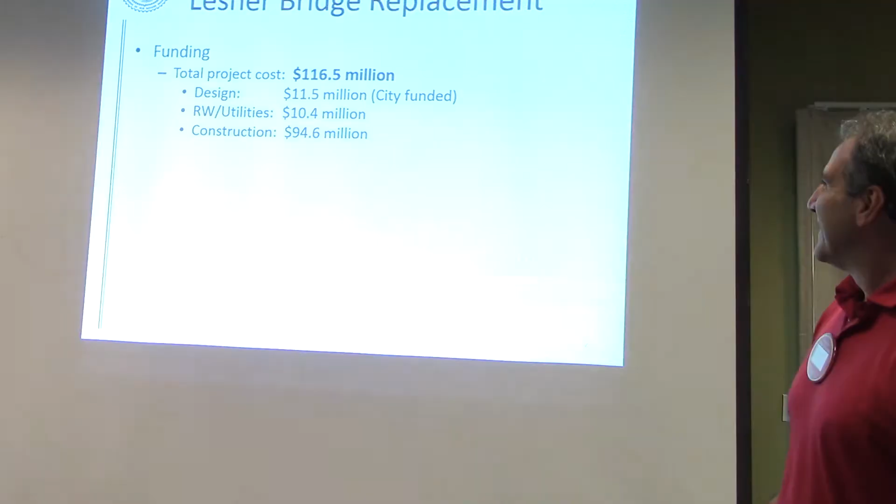Technology, you gotta love it. When it works, it's great. When it doesn't, well... All right, first question everybody wants to ask is the funding of the project.

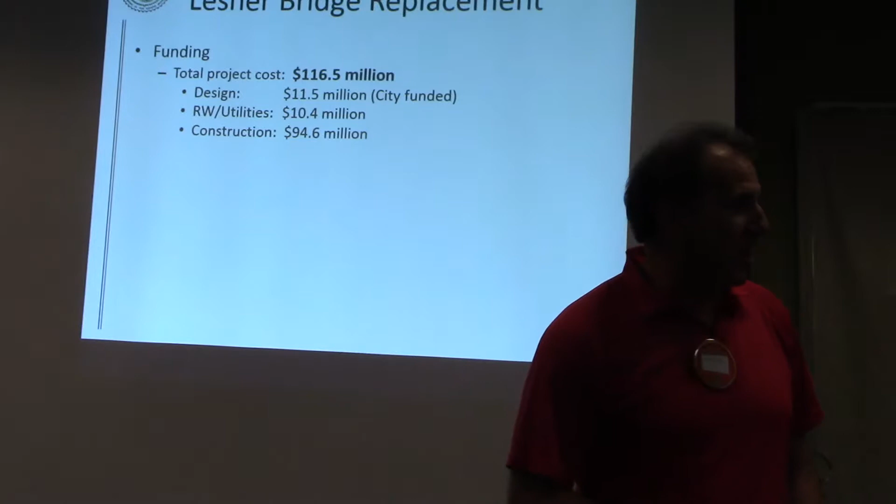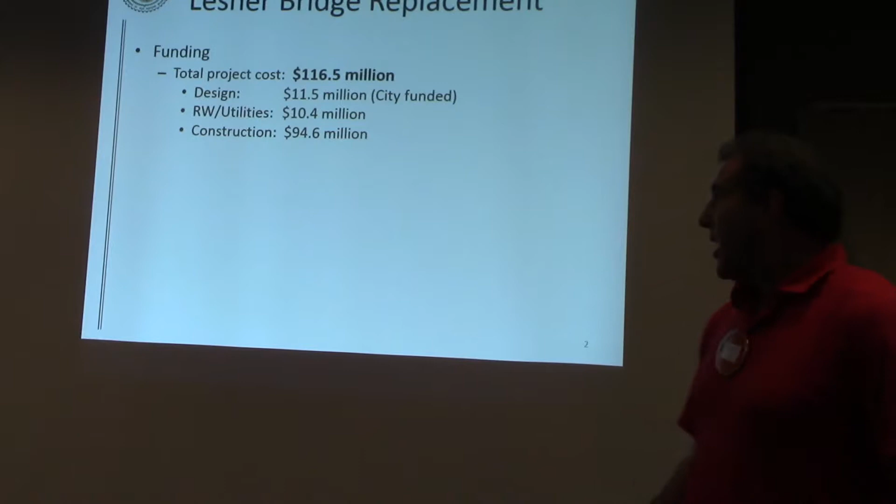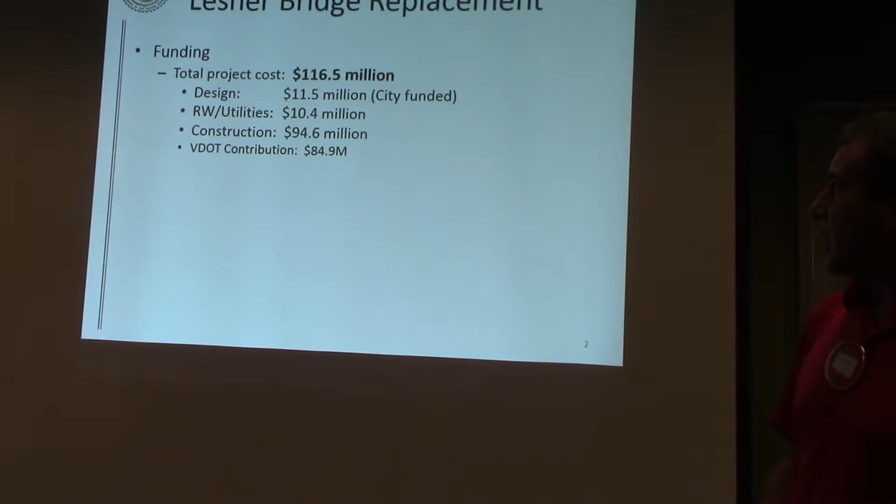We have $116.5 million - actually $119.5 million, with about $3 million extra contingency in this project. Of that total project cost, $11.5 million was design, $10.4 million was right-of-way and utilities, and $94.6 million is construction. The VDOT contribution to the overall project cost is $84.9 million, and the FHWA contribution is $11.7 million.

Schedule - I wanted to add a little bit here. As I mentioned briefly, this began in 2006 with the concept to put out the RFP to begin design. Design and permitting were completed in July 2013, about 7 years of going through design, vetting it with the community, going through the permitting process, negotiating different aspects of the design, and finally putting it all together and getting it ready for bid.

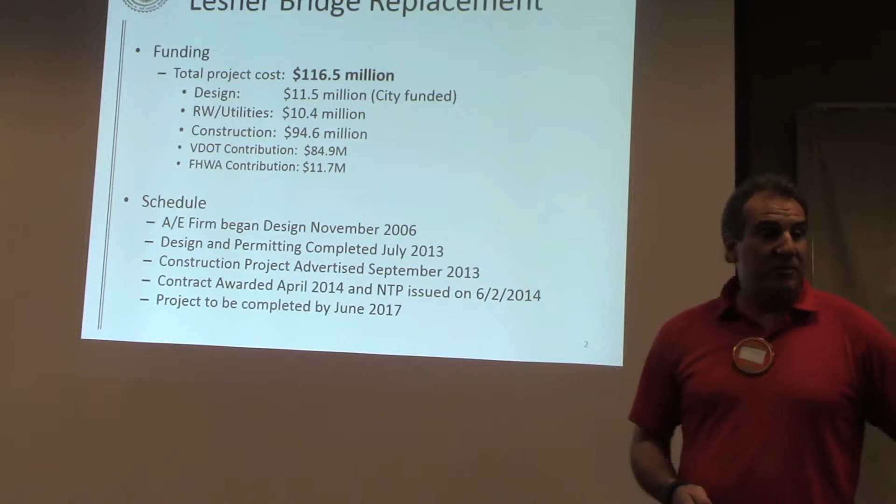We advertised the project in September 2013. We awarded it last April, in April 2014, and issued a notice to proceed on June 2nd of last year. The project is slated to be completed in June 2017.

Here's some of these file photos, a couple of them I got from the contractor.

The existing bridges are 1,530 feet long. The eastbound was built in 1958, the westbound in 1967. Both bridges have 28 spans - 25 concrete spans and 3 steel spans, which make up the 3 center spans of the bridges. And they currently have 4-foot wide sidewalks.

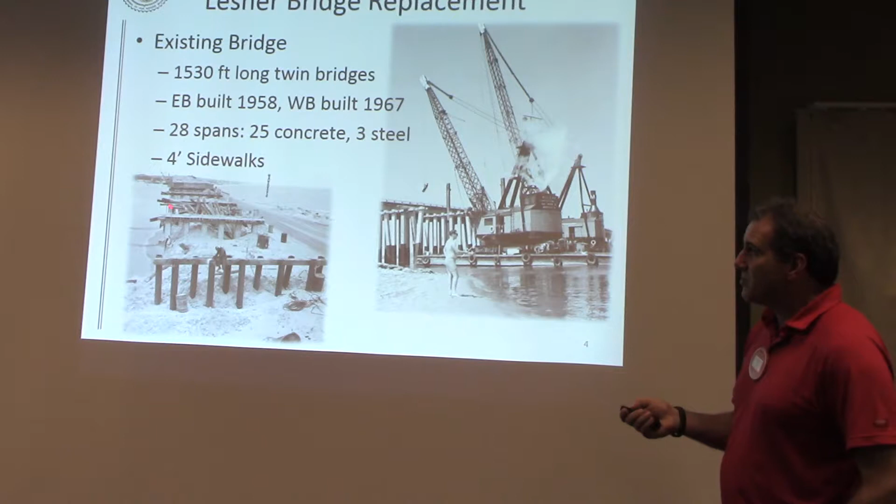What you're looking at here is actually the eastbound bridge. This is where the westbound bridge is today. It used to be a drawbridge right over here. These piles right here were pulled out when they were building the eastbound bridge because there'd be a railroad trestle right here - I don't know if any of you have seen some old railroad trestle, the old trains. Well, that's where it used to be, is right here. And these piles were pulled out when they were building the eastbound bridge.

Remember I mentioned OSHA? So here's the guy getting right up to the top. That would not be allowed today on our project.

In fact, another interesting thing - these 2 cranes right here, they were steam powered in the 1950s. These 2 cranes are actually on the project site right now - they've been converted to diesel. So not only did the same contractor win the project, he's actually using some of the same equipment out there.

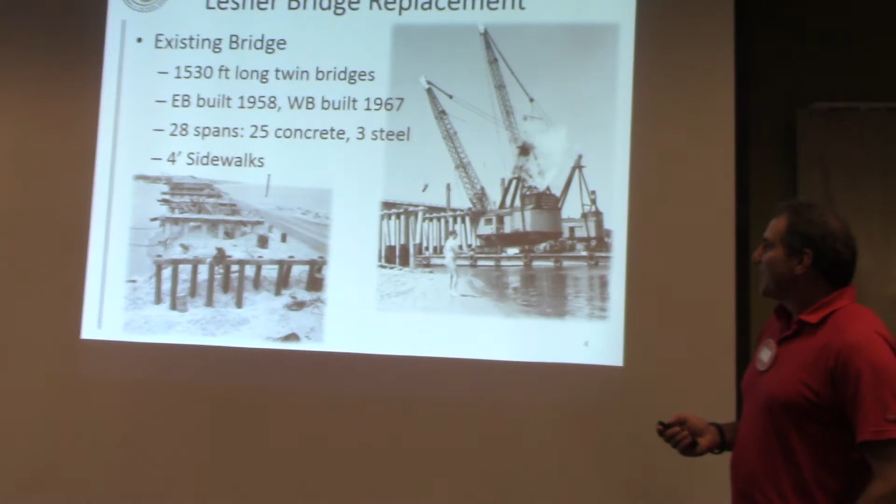That guy fishing not wearing a hard hat - yeah, that's another thing. That wouldn't be allowed today either.

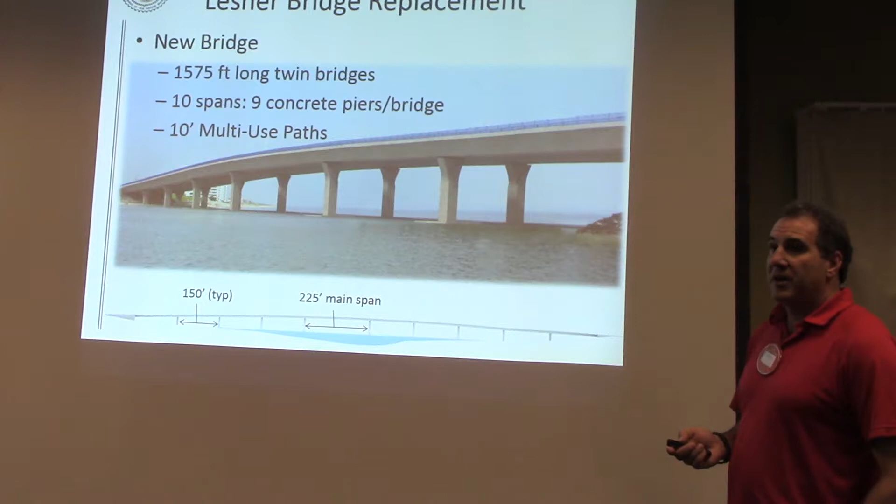Now, a little bit of a comparison. The new bridges are a little bit longer, 1,575 feet. There's 10 spans, 9 concrete piers, there's no steel span, so we've got a lot more open area between the spans of the bridge, about 3 times as much open area. We've got 10-foot wide multi-use paths, so instead of a 4-foot sidewalk, we have a 10-foot wide multi-use path. We say multi-use because we're allowing bicyclists to use that path.

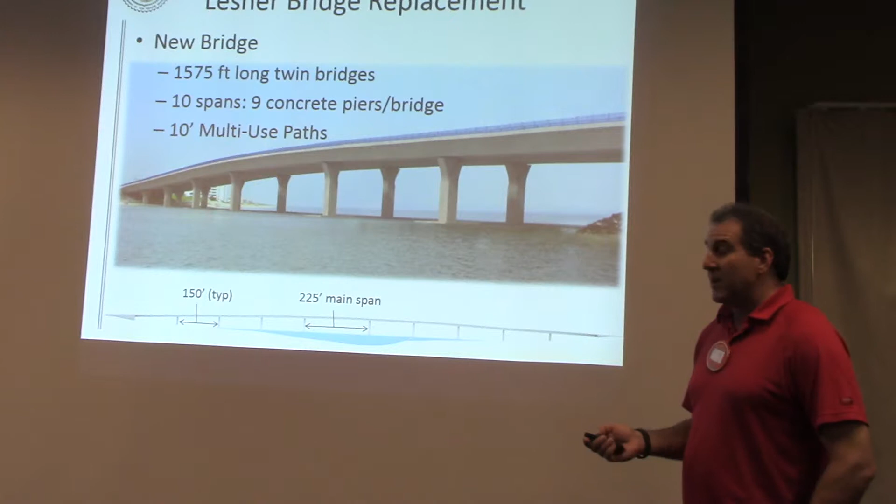So again, here you see the typical span is 150 feet. The main span over the channel is 225 feet. Right now it's about 90 feet, so significantly more room. Basically we'll go through the presentation from the bottom up.

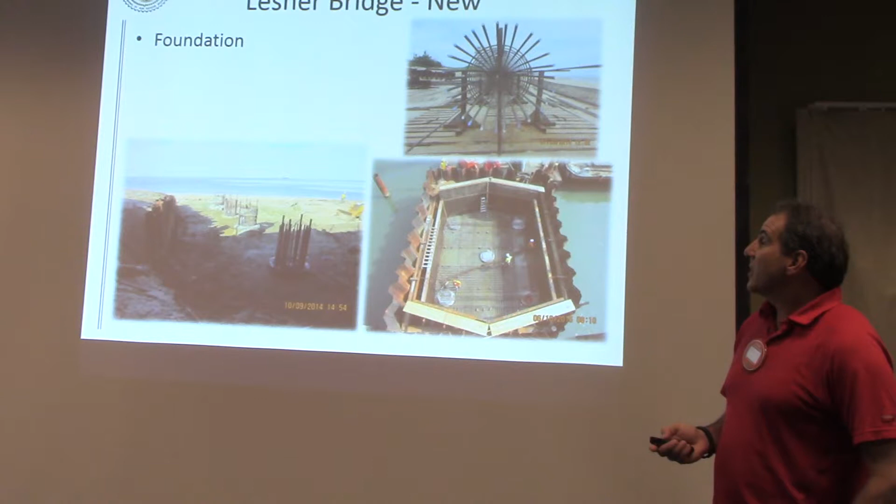So we're going to start with the foundations of this bridge. All the foundations on this bridge are drilled shafts, 4-foot diameter. We're using corrosion resistant rebar - it's not quite stainless steel, but it's certainly not plain carbon steel. It's also got a tensile strength of 100,000 pounds instead of 60,000 pounds, so it's very strong steel, very durable steel. We're using self-consolidating concrete because these shafts are...

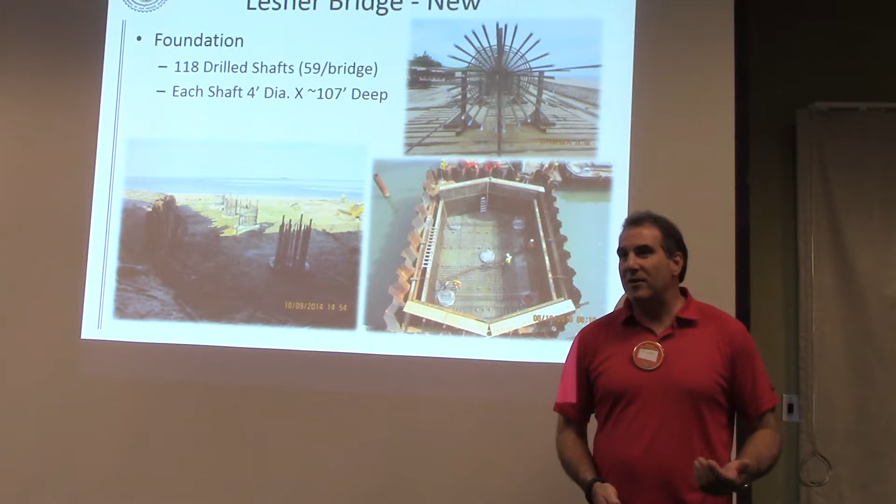There are 59 shafts per bridge, and they're about 107 feet deep on average. So you can't consolidate concrete very well at that depth, so we're using self-consolidating concrete.

It's just rebar. Actually, this was the foundation over by 3556 on the bay, and this is a footing being prepared to be poured over these foundations.

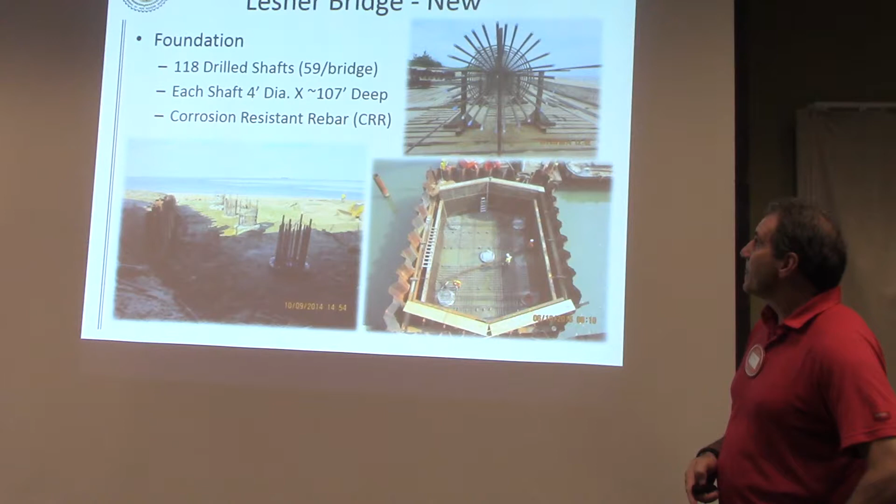Okay, the pier supports. The footing I mentioned is about 8 feet thick. It's mass concrete. There's 9 piers per bridge, and the pier heights typically range between 20 and 40 feet. And all the piers have a recess in here.

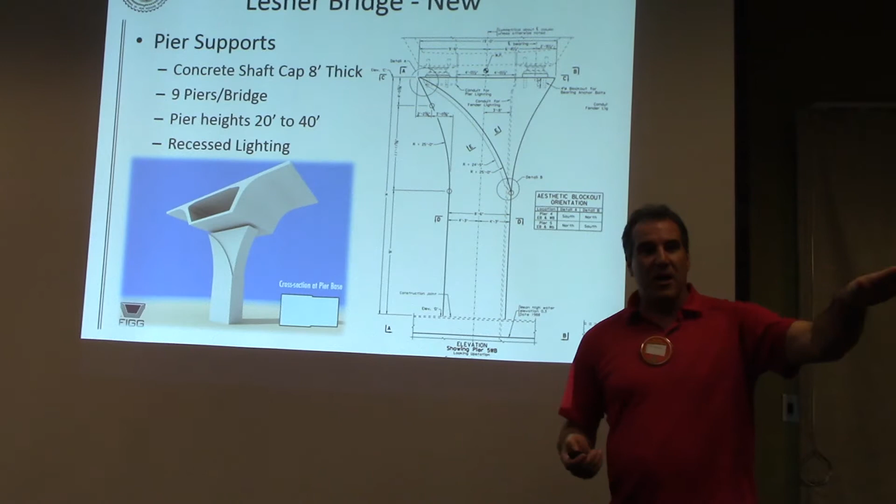And in that recess, there's all going to be LED lighting, so as you look at the bridge at night, the light's going to be shining up from underneath the bridge - you'll see that later. We're also going to have what we call necklace lighting on the edge of the bridge, so if you see the bridge from out at sea, you'll see the whole bridge outlined in necklace lighting. Along the pedestrian paths, you'll have LED lights shining down on the path from the parapet walls. And of course, we have street lighting for the cars in the center of the bridge.

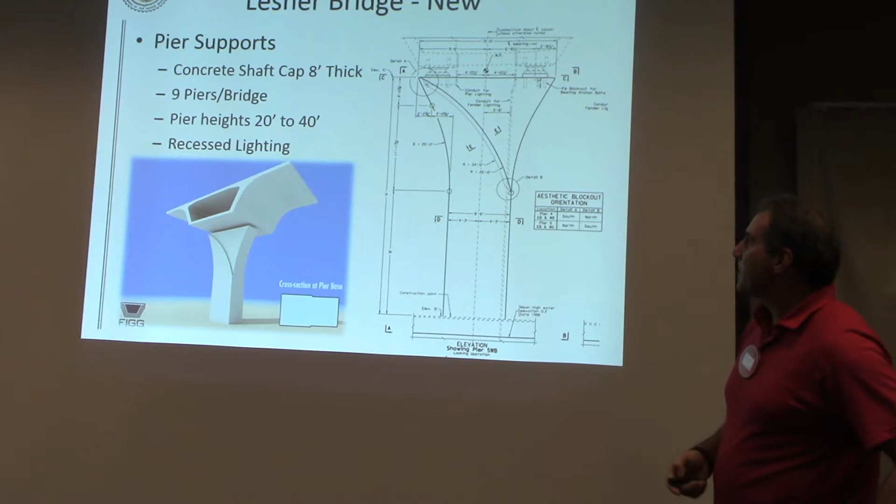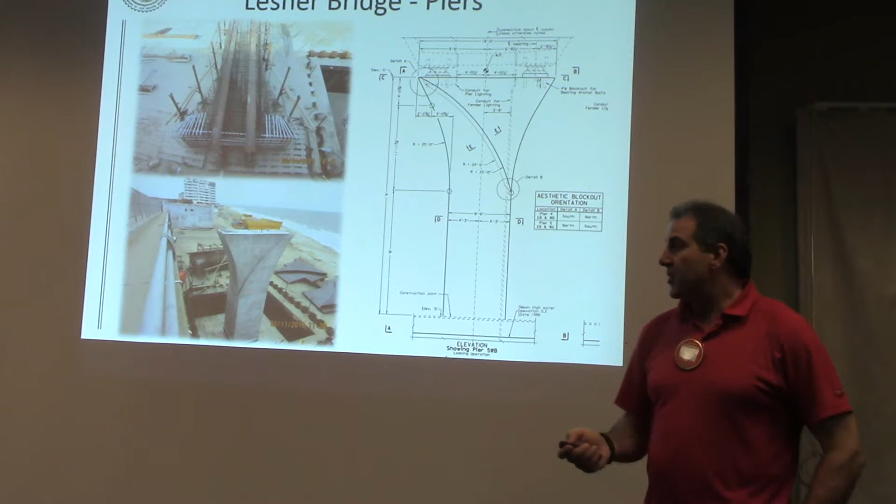This is one of the piers, the reinforcing steel before it was stood up. You can see some of these bars are actually stainless steel bars - so we're using corrosion-resistant rebar, and we're actually using stainless steel rebar on this bridge. And this is the completed column.

Okay, typical roadway. When we're all finished, we have 2 lanes per bridge. We're going to have a 14-foot wide outside lane. Right now, those lanes are about 11 feet wide on that bridge. So you got emergency or whatever.

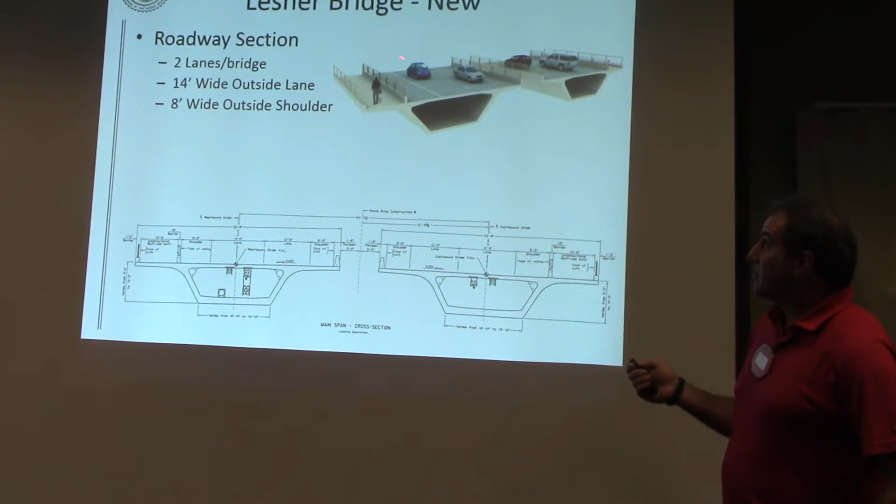Well, yes, it's actually for cyclists who want to ride on the road, but we also have an 8-foot wide outside shoulder. We have a 12-foot wide inside lane, and we have a 6-foot wide inside shoulder. So we have plenty of room on that bridge - for cyclists, and God forbid there's an accident, you got room to move the vehicles off to the side and keep traffic flowing on that bridge.

So what's the total width of your span? That's 53 feet 8 inches. So this is actually from outside edge to outside edge, 53 feet 8 inches.

And what I was mentioning before about the necklace lighting, that necklace lighting is down here. This is the parapet wall, this is the barrier wall. So we actually have lights recessed in these walls for the pedestrian path, and the street lighting will actually be on the inside of the bridge. Yeah, it's hard to see.

It's 53 feet 8 inches from outside to outside edge. All of our utilities are inside the bridge. In the westbound bridge, we have the water line, spare conduits for Dominion Power, communication lines, and bridge lighting. The eastbound bridge has fewer utilities, but we do have some spare conduits for communications and bridge lighting.

A lot of people ask what this distance is, and that distance is approximately 8 feet.

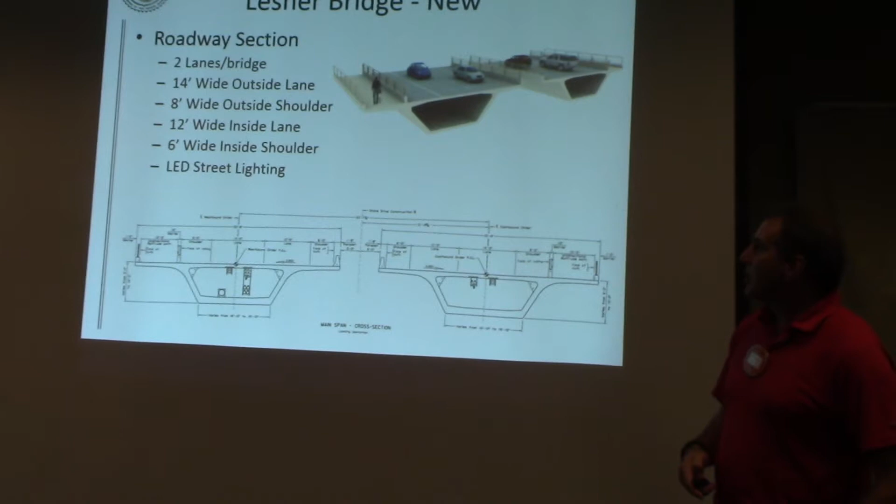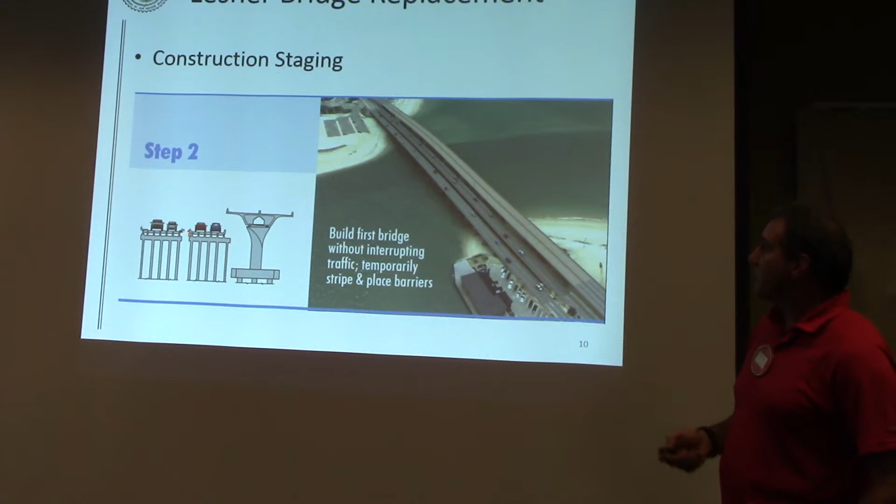Right now, we're in stage 2 of construction. People ask how we're going to maintain 4 lanes of traffic, and this is how we're going to do it. We're going to build a westbound bridge first. Once we're completed with the westbound bridge, we're going to move all 4 lanes of traffic to that westbound bridge, and then we'll demo the 2 existing bridges.

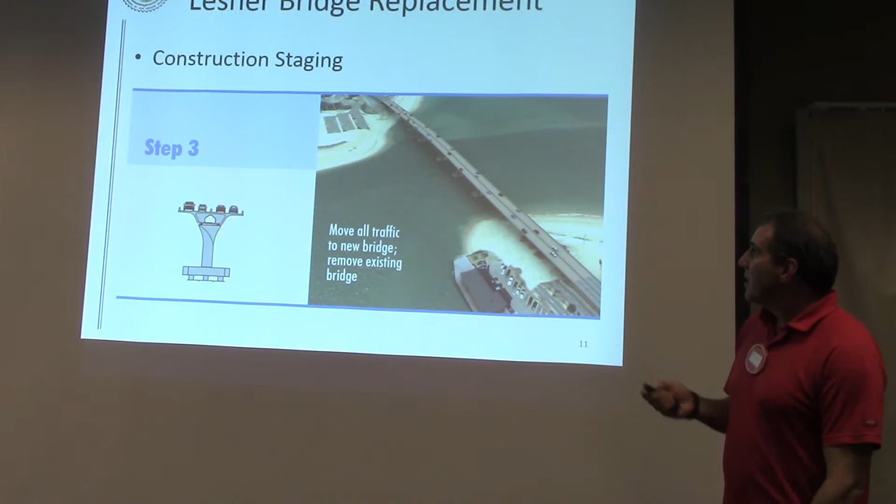The new bridge is wide enough to hold 4 lanes of traffic, plus a temporary 4-foot wide pedestrian path, so we still allow pedestrians and cyclists to get through. Once we move all that traffic there, we build the new eastbound bridge and move the 2 eastbound lanes back to where they're supposed to be. Then we return to the westbound bridge and build out our 10-foot wide multi-use path, completing the project.

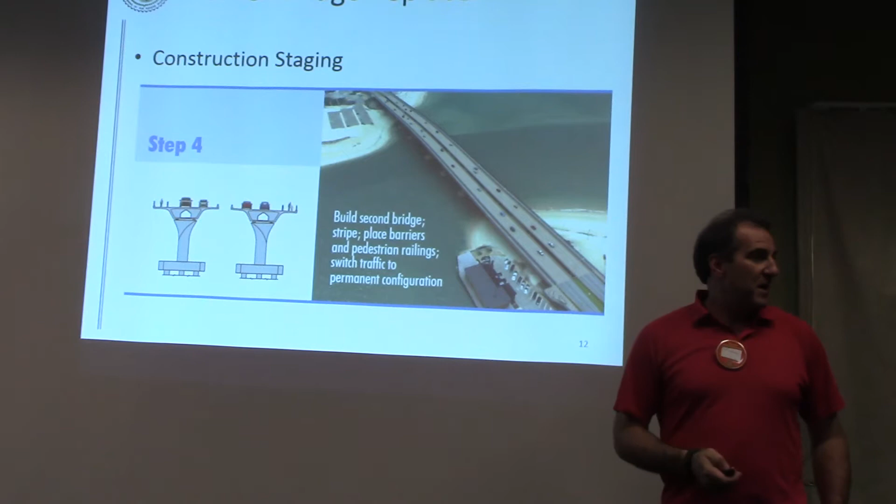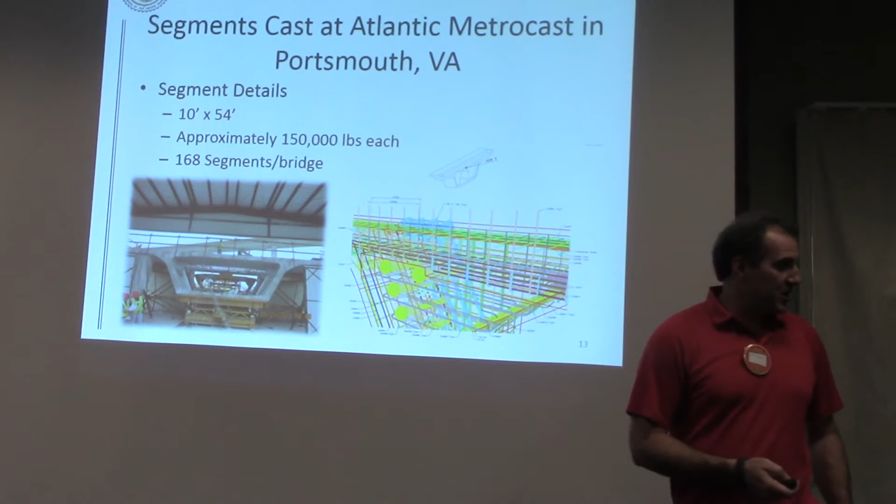I want to talk about some of these segment details. This is a cut from one of the plan sheets. The reinforcing steel, pre-stressing, and ducts going into each segment at the casting yard are so complicated that you actually had to do color 3-dimensional drawings for the guys to understand which bar goes where, because looking at 2D plan sheets, all the lines seem to go together and you'd go blind. So we provided these 3D drawings for the guys erecting these cages to make sure all the right bars go in all the right places.

The typical segments are about 10 feet wide by 54 feet long, about 150,000 pounds each, or 75 tons, and there are 168 of these segments per bridge.

All the segments are being cast at Atlantic MetroCast in Portsmouth. That's one of the beauties of this type of bridge. As we're out at the construction site building the foundations and substructure, the superstructure is being constructed at the same time, off-site. Right now, at this stage of the project, both things are coming together - the segments are arriving to the site, and we're moving ahead with the superstructure.

I don't know how many of you have seen the construction sequence animation. I know some of you probably have. I've got a link to it here, which I'll show you later, but it shows how this will start coming together really fast.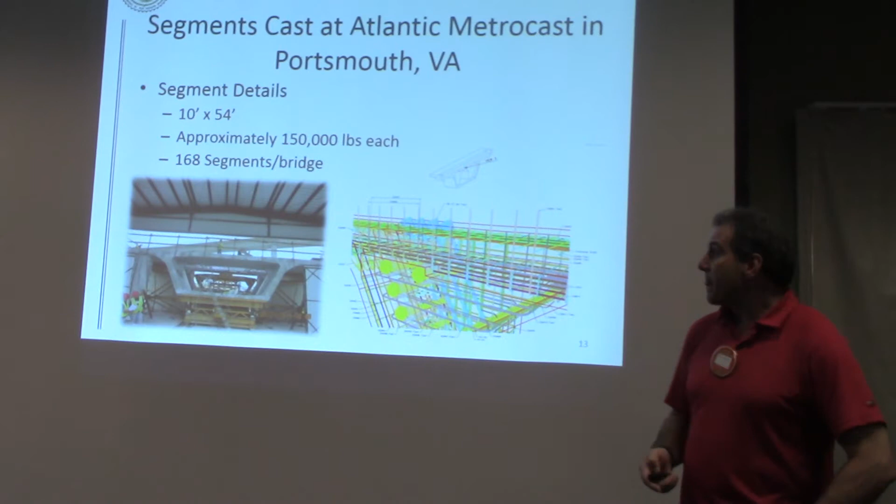A little bit about the casting yard. This formwork, what we call a bed - we have 2 beds for this project. It was custom made for the Lesner Bridge project in Pittsburgh, Pennsylvania. They made it up in Pittsburgh, shipped it down to Atlantic MetroCast in Portsmouth, and that's the formwork we're using to build all these segments.

There's a lot of quality assurance and quality control on each of these segments. We're actually surveying these segments down to the accuracy of 4 decimal points. You'd think big construction would have a tolerance much greater than that, but we're testing for warp and twist on these segments. Everyone's got to be perfect because they've got to line up out in the field - if you're off by a little bit on one segment, you'll be off a lot 1,500 feet down the road. In this picture, you see a survey station.

We actually use 3 different survey stations at the casting yard, with 3 different surveyors surveying each segment. There are 6 pins on top of each segment that they survey and verify before they cast the concrete. They make every fine adjustment needed at the formwork, and they do all the surveying before the sun rises because, believe it or not, at 4 decimal points, the heat of the sun will actually throw off the survey. I wanted to talk about that because this is big concrete, big construction, and it's easy to take for granted.

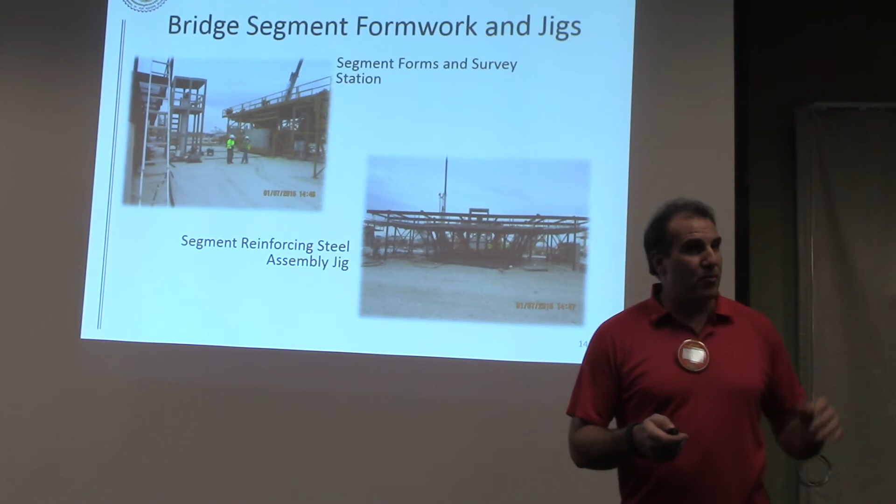The concrete on this project at the casting yard is a design mix between 6,000 and 8,000 pounds, but we're actually getting compression tests of about 12,000 psi. Your sidewalk is typically 4,000 pounds, so it's very strong concrete. We've also specified a low permeable concrete, so between the corrosion-resistant stainless steel rebar and the low permeability of the concrete, we're going to have very little saltwater intrusion into the rebar over the years to attack it from the inside out.

So Chris, really, who's the concrete company? It's actually AMI. They have their own batch plant on site, and we actually have our own inspectors out there making sure that the batches they're mixing meet all the quality standards. They're mixing all their batches literally right next to where those forms are.

How do you determine the quality of the concrete that you use? Well, they're checking for air entrainment, they're checking for slump, which is how much the concrete settles. We're also collecting test cylinders. So when they place the concrete, say they got a 6,000 pound mix, we collect test cylinders and do a 7-day break, 14 and 28-day break. That was my question. And what is the weight? What's the most weight that load can have?

The most weight? You have to consider semis going over that bridge. Oh, you mean on the bridge itself? Well, believe it or not, this bridge was actually designed for the construction loading of that big yellow and blue gantry out there. It's over 1.1 million pounds, on two feet that are 18 inches in diameter. If you figure the square footage of those two 18-inch diameter feet, and divide 1.1 million pounds by that, the point load is tremendous. So the bridge was actually designed for that. The service loads for cars and trucks are nothing compared to the construction loads the bridge was designed for.

How about a hurricane, like a Category 4? It's funny, the wind loading - AASHTO dictates how the wind loading is handled on that bridge, and it's a lot more complex than I thought. They assume wind hits it at a 90-degree angle at the side of the bridge, then at a 30-degree angle, then at a 45-degree angle, and analyze that for different wind loads to make sure the bridge isn't going to fail. There's also analysis of how we're going to change the hydraulics in the channel. We're taking out the old bridge and putting in a new one with larger footers - how will the hydraulics change, how will the scour change? That determines how deep our foundations have to be.

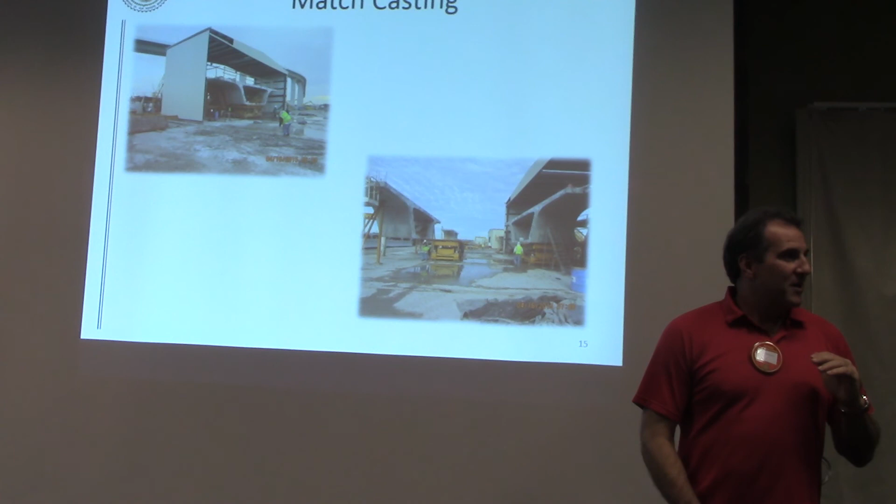And what is the lifetime? What do you project the lifetime of this bridge to be? 100 years. We won't be there. It's a 100-year design.

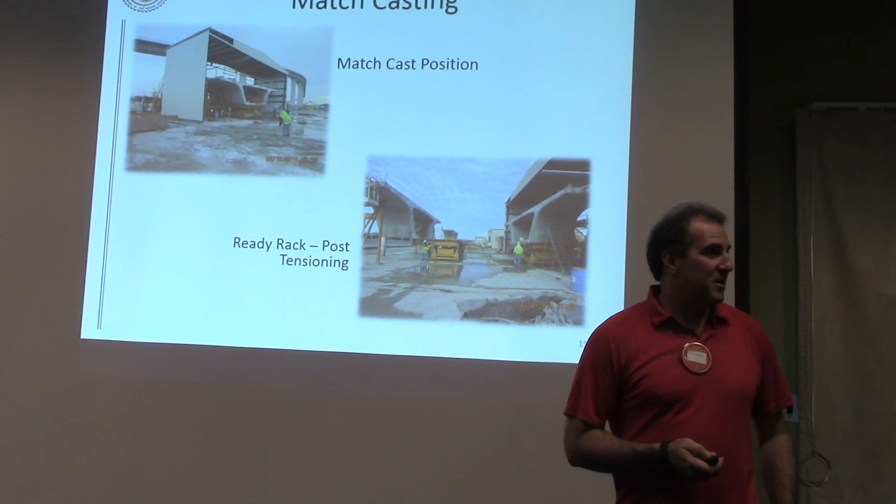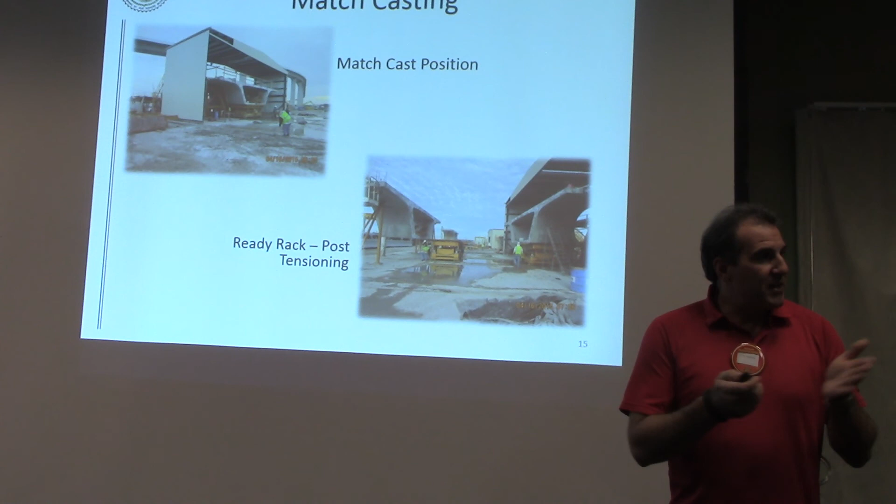The casting yard is actually kind of neat. You've got to have these segments fit together perfectly out in the field, so we're using a match cast technique. That means here in the formwork, you're actually casting the new segment right against the segment that was previously cast. They put a bond breaker on the whole face of the segment being match cast against - that bond breaker is really talcum powder and soap. They cast the concrete right up against it, then move this out of the match cast position.